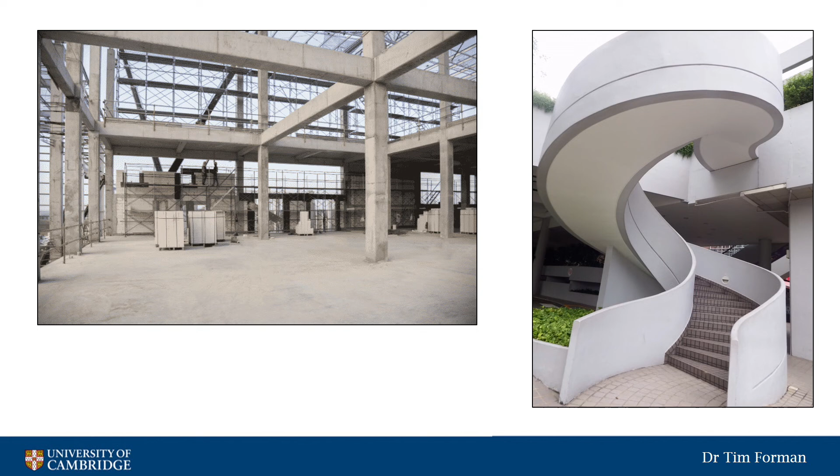So we all know that concrete is a wonderful material. We might even call it a wonder material. It's used really everywhere around us. We have come to take it for granted as part and parcel of how we build and construct our built environments. And in fact, when we look around the UK, the vast majority of cement is being used in buildings, not in roads or in infrastructure, but in buildings. And we know that across the UK, the primary use of concrete across all sectors is in fact in concrete frames for buildings, which we might argue is perhaps not an absolute necessity to be using concrete in that sort of application, but nevertheless a highly useful and affordable material it is.

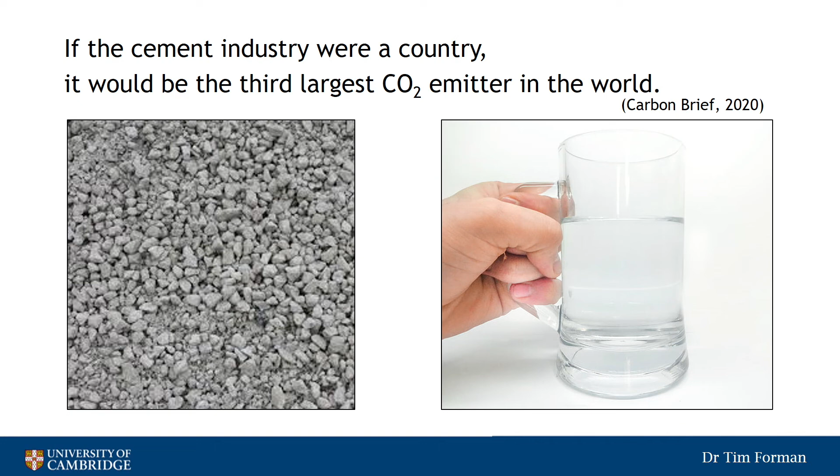In fact, cement is such a wonderful material that it is, next to water, our most consumed resource globally. And when we think about the carbon intensity of cement, we use so much of it that if it were a country, it would be our 3rd largest emitter. That's the 3rd largest emitter globally, strictly from the production of cement itself.

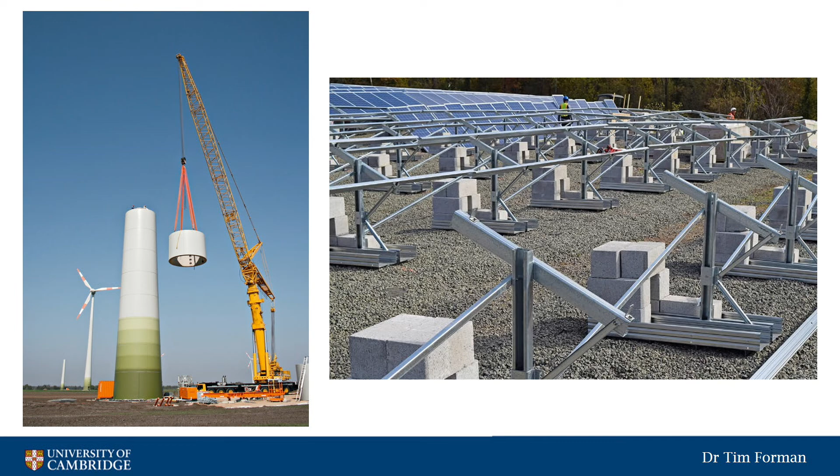How do we build our built environments without cement? I think arguably we know that we cannot, so we need to find new ways of adapting. In fact, it's so ubiquitous that we even need it to construct our renewable generation technologies, such as windmills or photovoltaics. So what's the problem with cement?

Well, I might boil it down to 4 principal categories: energy or carbon, water, sand, and the waste that it typically engenders when we build with it. So in terms of energy and carbon, we know that roughly 7 to 8% of global carbon emissions are coming from the production of cement.

In terms of concrete, of which cement is of course a part, globally about 9% of industrial water usage, or almost 2% of all global water usage, is being tied up in the production of concrete. Using sand as an aggregate is not a necessity, but of course is by far and away the formulation that we look to, and we are using it at such a rapid rate that indications are over the next 30 years or so we will be outstripped of our supply globally. We will have no more available resources of sand that could be economically tapped.

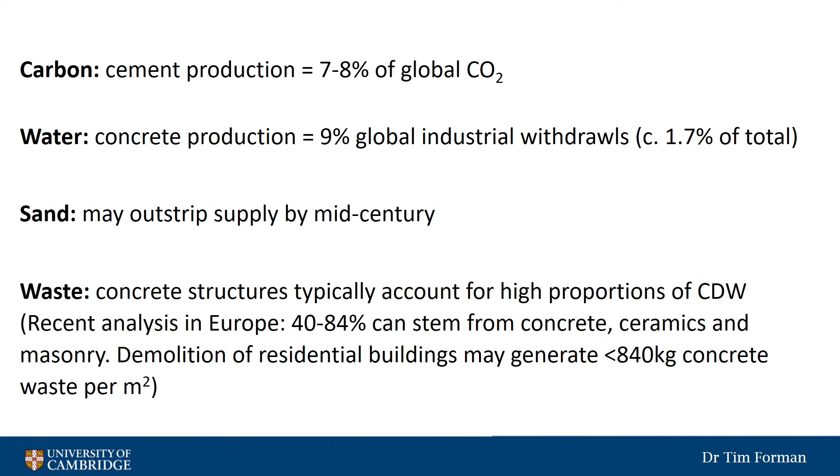And then lastly, thinking about waste, production of concrete or cement is not necessarily creating much waste, but the use of concrete in our built environment is a very large factor of our waste. So much so that when we think about the waste leaving construction sites at the end of their lives, somewhere between about 40 and 85% of all that waste tends to be concrete in Europe. And when we think about residential buildings built of concrete in the UK, some studies have found as much as 840 kilograms per square meter of living space is being produced just as concrete waste at the end of an asset's lifetime.

I'll run very quickly, as I've been tasked with giving you a bit of an overview and introduction to the issue, through some of the inherent problems that cement manufacture carries with it.

In essence, much of it boils down to this. Our current way of producing cement, which accounts for about 98% of the cement we're producing globally, is Portland cement. Portland cement, by its very definition, creates CO2. You don't need to remember your chemistry class too much, but it helps to recognize that this is intrinsic, this is a problem. Strictly, the conversion of limestone and clay through the application of heat to produce clinker, the core component of cement, is itself responsible for about 50 or 60% of the CO2 emissions of concrete itself. So that is a chemical reaction.

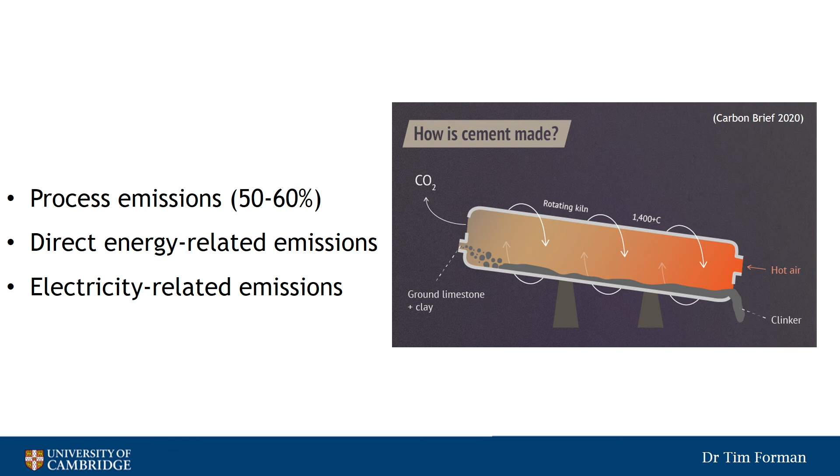We, as it stands, using the raw ingredients that we are using, we cannot get away from that. And the balance of those emissions, which aren't what we'd call process emissions, are coming from the heat required in this process and the energy being brought into the production facilities.

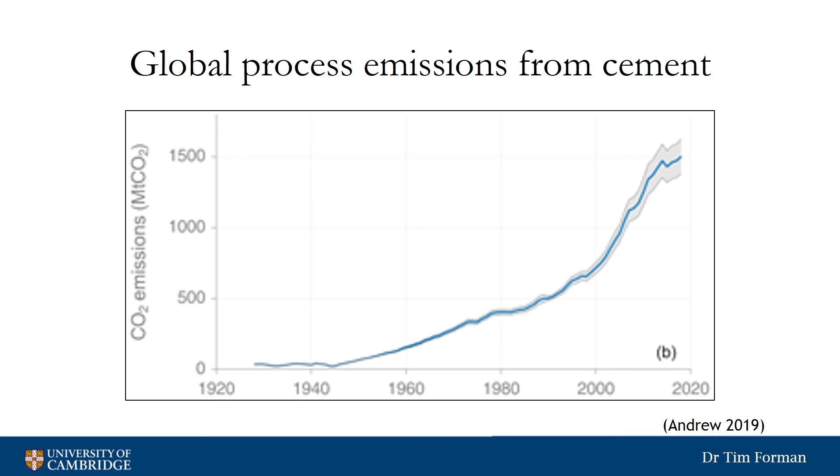So we know that this is in fact creating a growing problem in the UK, and in the world, this is not a problem which is going away. This is a graph showing you from about 1930 to present the process emissions. That's the chemical reaction that occurs when we produce cement. It's not accounting for direct heating or indirect electricity supply, but strictly the process emissions are growing and growing. When we look at cement production globally, it's a similar story.

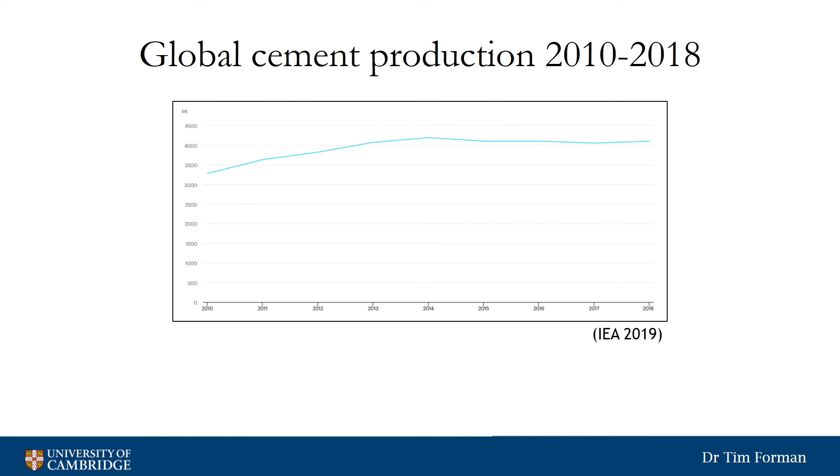Much of this, the vast majority, is actually happening in China, but countries like the UK, across Europe, we are all continuing to produce cement at considerable quantities. We know that currently we're producing globally something in the region of 4 billion metric tons of cement, and under a business as usual trajectory, that is predicted to increase to 5 billion by 2050. So when we talk about having a zero carbon future, zero carbon by 2050, this is inherently a conflict.

I'll run very quickly through the carbon challenge. I think we're all aware that this has become a defining issue of our times. The Intergovernmental Panel on Climate Change, a union of scientists around the world, have produced in the last year and a half a projection of where we need to be, what we need to achieve to reach zero carbon by 2050.

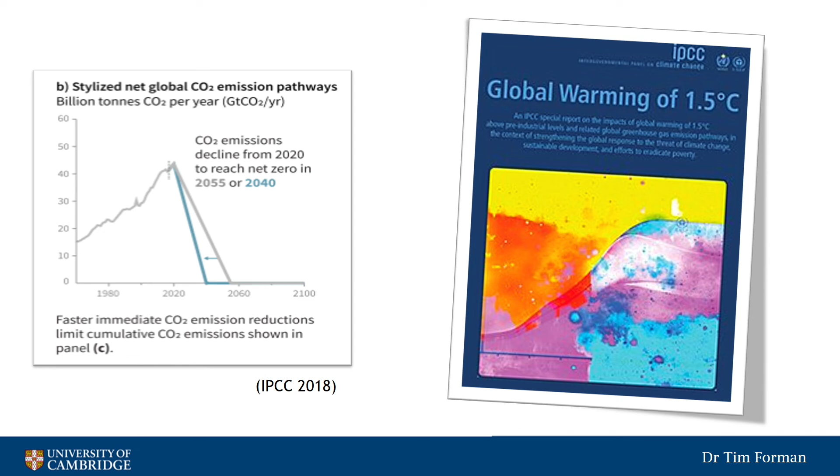We know that's what's required to keep our chances of exceeding 1.5 degrees Celsius to 50%. So if we want a 50% chance of limiting global temperature increase to 1.5 degrees C, we need to achieve what's shown there on the graph: zero carbon by sometime between 2040 and 2055 globally. That's a stark challenge. I like to show my students this.

I think this helps to demonstrate it, helps to get your mind around what that feels like. As built environment professionals, what do we need to be doing? It's rapid decarbonization. So to do that globally, we need to be reducing our emissions by about 7.6% each year over the next decade, and to keep in line with the Paris Agreement, which is not 1.5 degrees but 2, or some estimates say 3.1 degrees C.

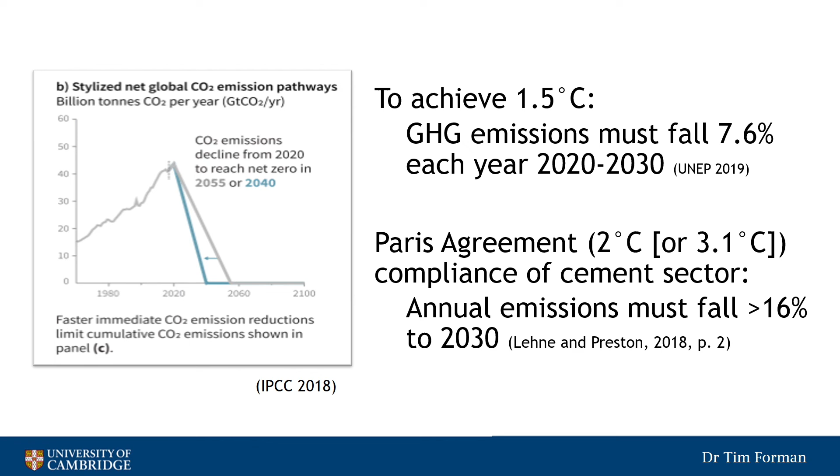Just to meet that objective alone, the cement sector needs to be reducing its emissions by approximately 16% year on year over the next decade. So that's a very stark challenge.

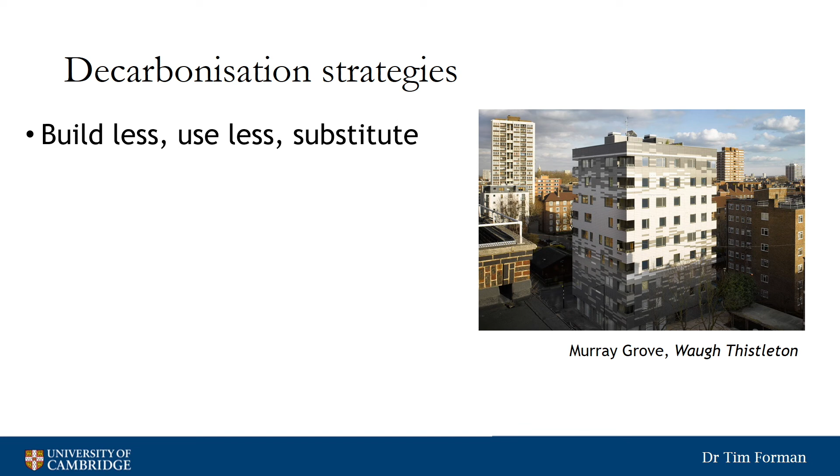I'd like to run through quickly some of the strategies of how we might get there. I would say, first of all, let's not build. I think that's perhaps a controversial statement here at Future Build, but that is the obvious truth. If we want to decarbonize rapidly, we need to simply not build as much, or build with less, or build with lower carbon materials. So as a hierarchy: build less, use less materials to do that, or build differently.

We need to be thinking about embodied carbon. That's a term we should all be very familiar with by now. We need to understand that it's not just the operational energy, not just the energy it takes to build or operate a building that matters. It's all of the carbon from the point of origin through to the end of the asset's life that counts. When we think about design or construction, we need to be thinking in terms of embodied carbon.

Is cement the right material to use, or is concrete the right material to use? Sometimes it is. It has many great advantages, but often it's alternatives that make more sense, alternatives such as timber or steel.

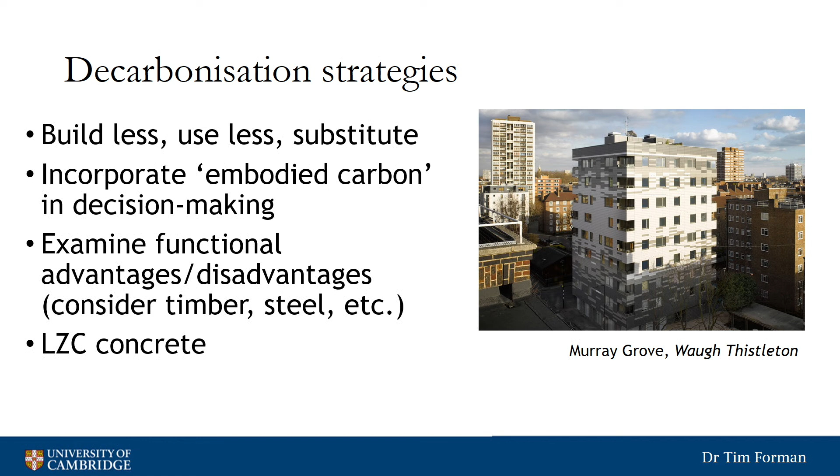So within the supply chain, there are opportunities. We are seeing the introduction of more and more supplementary cementitious materials. Things like GGBS or fly ash are becoming more and more common. In fact, in the UK, they're accounting for about 20% of our carbon reductions that we are achieving.

Fuel switching, the fuel that's used to heat that clinker, and then finally carbon capture and storage, though notably we don't yet have proof that those technologies are working.

We need to be doing more with less. We need to be optimizing our structures. We need to be creating lightweight structures. We need to be looking to technologies with which we can achieve the same structural properties without as much material.

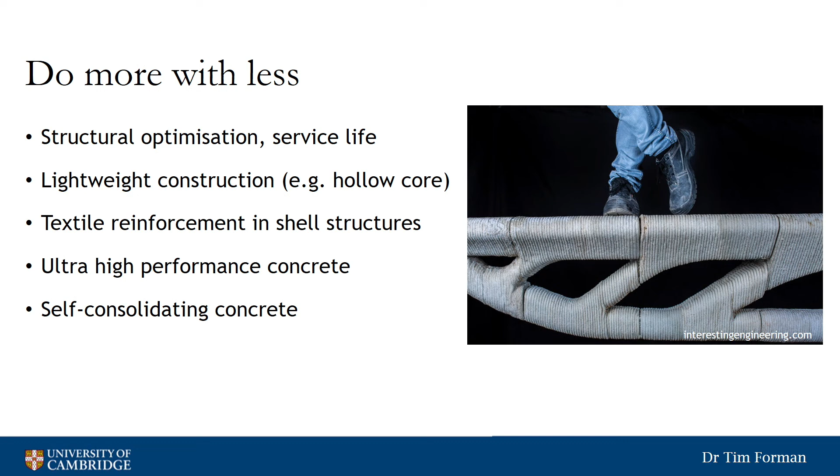We need to be constructing differently, I would say. Can we use precast concrete to our advantage? Sometimes we can, sometimes we can't. It may cost more, but typically it gives us lower carbon.

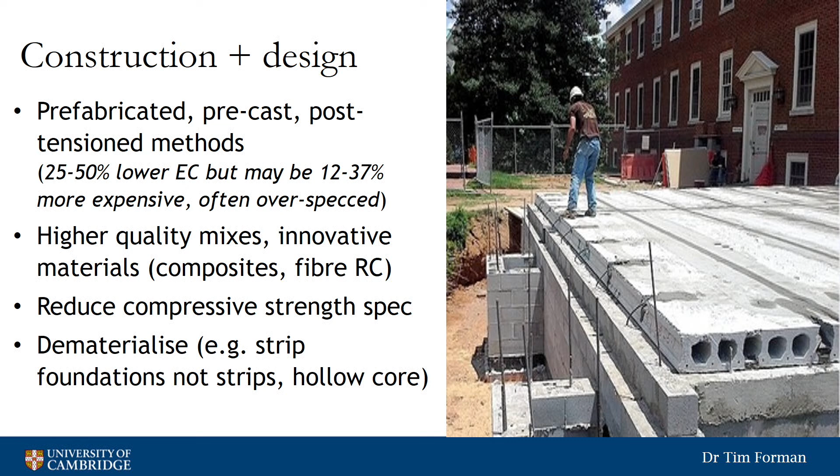It's important to specify only what we need and not over-specify. I think we are all familiar in the industry of how easy a habit that is to slip into.

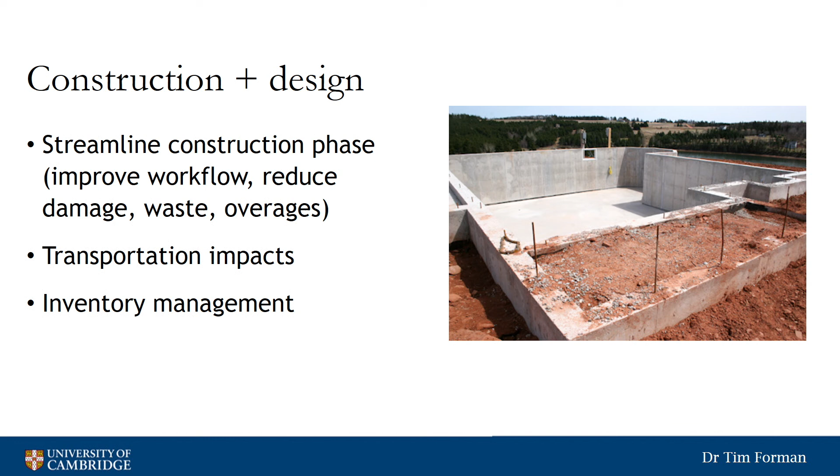In thinking about how we use cement in the actual process of construction, I think we can become leaner, we can become more efficient, and that's very important to do. We need to be reducing the impacts that are required to transport materials to sites and then from sites at the end of their lives.

And finally, closing the loop. We are all hearing more and more about the circular economy. How can we use cement as part of that? I would argue that designing for deconstruction, creating buildings that can be disassembled, having a national database for these waste materials, or materials at the end of their lifetime, is critically important.

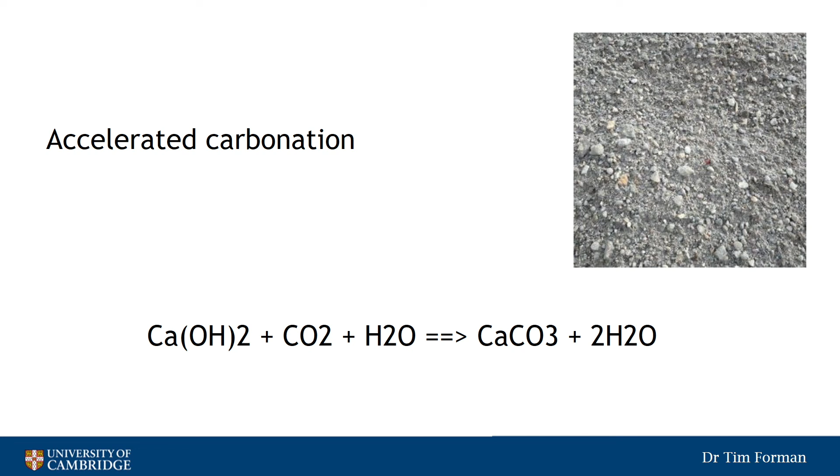And finally, there is a lot of talk about the potential for accelerated carbonation, so that is the absorption of CO2 from exposed concrete, or more promisingly from exposed concretes like magnesium concrete. That is a real opportunity, but I think we are probably making too much of that opportunity than is actually a reality. There are lots of issues with why that's not actually as achievable as we might like to think.

Skipping quickly along, there are emerging trends, I would say, that are very promising. Our ability to use computational power to predict, to structurally optimize our designs is growing year on year. It's important that we harness that.

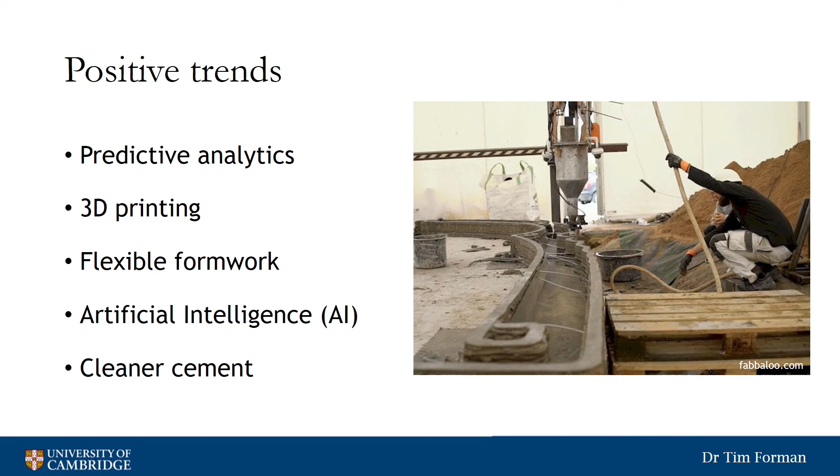Can we harness the opportunities that additive manufacturing, 3D printing offer us to dematerialize, to use less, to apply cement, or to supply concrete only where we need it? I would argue we can. And further opportunities such as AI all should be driving forward these capabilities.

So very quickly, I'll run through just a couple of the barriers and let you read the rest. We talk a lot about the use of GGBS, which is a byproduct of steel manufacture, and of fly ash, of coal power. Those are very good resources. However, we have finite stocks of them, and in a zero carbon future, certainly in the UK and in Europe, we really do not have the stocks that we need to decarbonize cement manufacture.

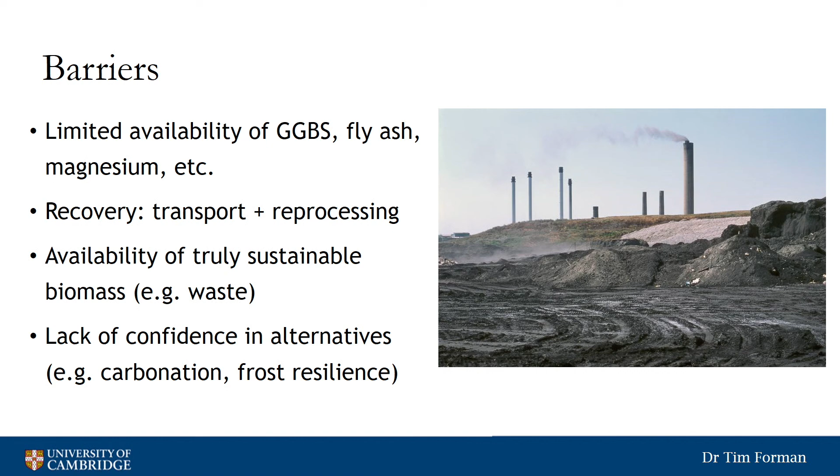Other places may have a different story, such as China or India. I think part of the problem really is that the global cement manufacturing industry is a very concentrated, consolidated industry. There are a small number of major producers. Those producers hold the vast majority of intellectual property that we need for decarbonization.

They have been slow to bring new products to market. They've been slow to decarbonize their own industry. So we're reliant in part on them and on SMEs who are holding some of the other innovation patents to drive this change forward. So we need to be moving past this reticence to change our business models. We need to be introducing the real cost of carbon in our decision making.

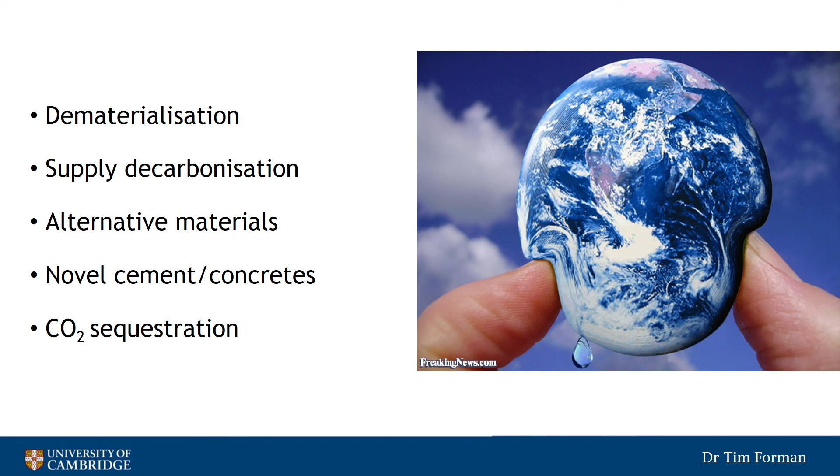We are, unfortunately, I think we are still reliant on the R&D from SMEs and from major producers to do this. So in summary, how do we achieve this dematerialization? How do we achieve the decarbonization of our cement supply? How do we transition to using alternative materials, novel cements, new cement mixtures, and how do we ramp up the sequestration potential of concrete? I would argue that it's really down to 4 simple but yet very challenging directions.

The first is we need to continue the drive toward more innovation. We need to fund more innovation. We need, of course, more research. I would say that as I'm a researcher. We need to demonstrate these products and their ability in the market. And lastly, we really need to drive the market through all of our practices. We need to be driving the market for cleaner and lower carbon cement and concrete.

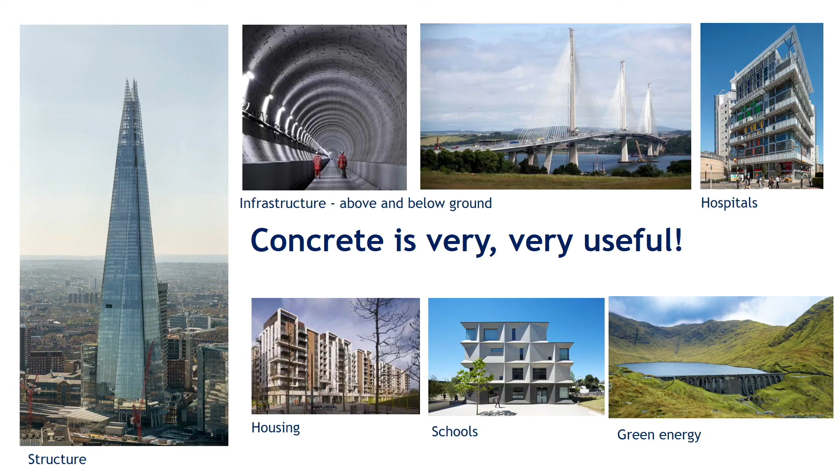So what's going to change about the way that we live today that's going to mean that we don't need its performance? That's a really important question we've got to ask ourselves, and it's a critical time, everything is under scrutiny. It's the performance of concrete, not just the fact that it's really good at fire and it's everywhere and cost effective, but it provides us with really good key benefits that support the way we live today. If we're going to change the way that we do things, maybe we can do it with other materials. What's going to give?

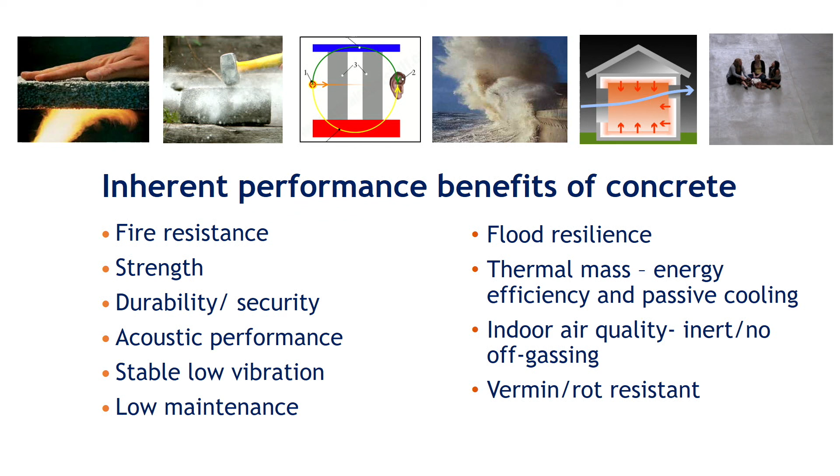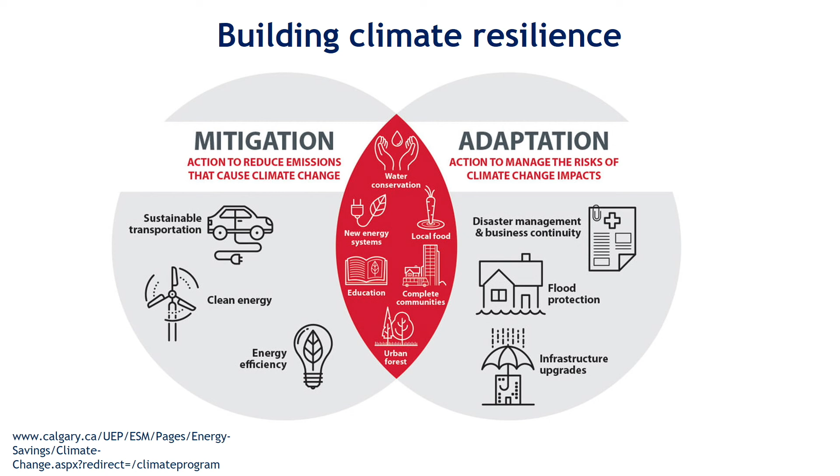I would argue actually a lot of these are all sustainability benefits. I'd argue in the future, in a climate change emergency, concrete might even be more needed. It provides passive cooling, that risk of overheating, a really fundamental risk we know affects our health within the UK. And floods, we know we've been suffering from all of those things today. It's really, really important - if we're talking about climate change adaptation, climate change mitigation, we have to look at both sides of the coin. You cannot talk about one without the other. It's now embedded in the way we're looking at these things. We've got to think about mitigation and adaptation - there's no point in doing one and not the other, you'll just be undoing all that good work you're thinking about doing in the first place.

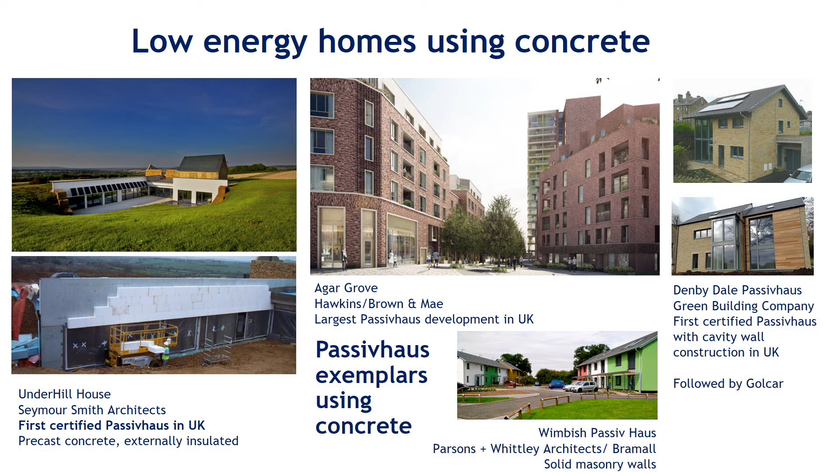So what does construction in a low-carbon future need to do? It needs to be energy efficient. Concrete, like every material, can do it - there are more Passivhaus examples using concrete than any other type of material globally, believe it or not. It can get there, and that's all about our detailing as architects, isn't it? It's about energy efficiency, fabric performance, attention to detail. We just have to do that better than we've been doing, maybe.

The thing that concrete brings to the table is added value. It's got thermal mass, so it means your structure can also passively cool, which means reducing energy use throughout our building.

The definitions for net zero at the moment are all about operational energy. They're not yet about embodied. I'm going to get onto that in a minute. But it's a really important factor, we must not forget that.

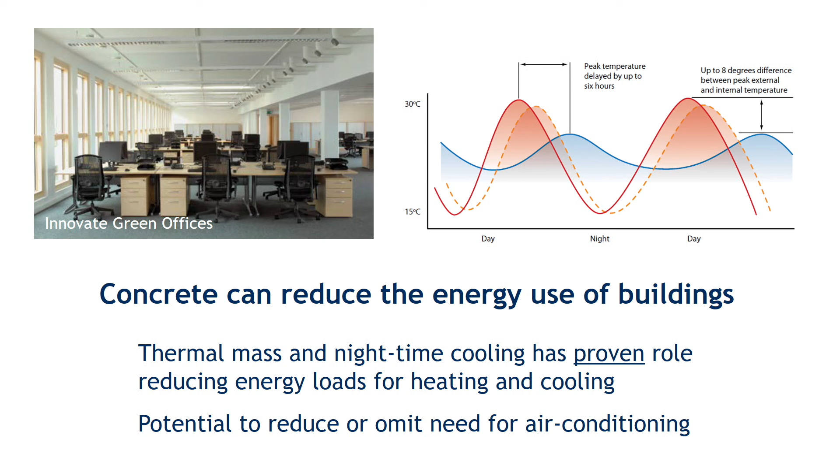So what are the credentials of concrete? We've talked about it before. I would suggest that probably UK concrete is much better than you'll think it is already. This is an industry that has been decarbonising for decades. This isn't new, okay? It's 30% lower than it was in 1990.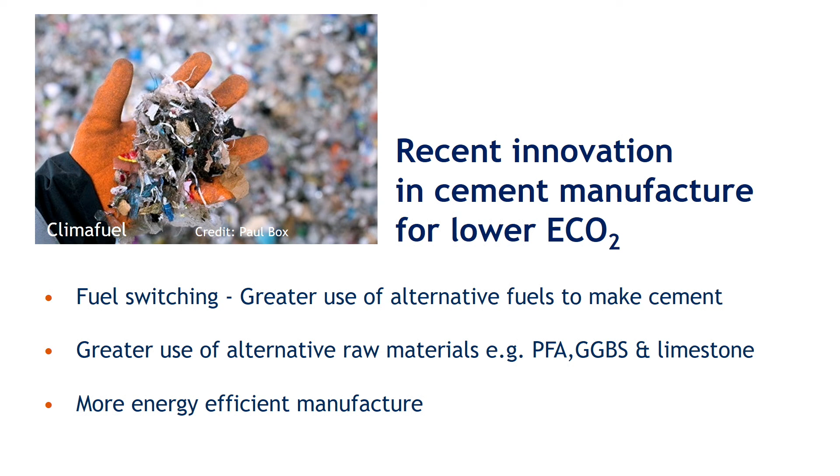But how has the industry been doing it? They've been decarbonising, fuel switching, all of the things that Tim talked about. It's not the end of the road, there's still an enormous amount that could be done, but they've been doing it. There's been a commitment to do this: greater use of other alternative raw materials, and more efficient manufacture.

So is it enough? It's a good question. A lot of people will say it's not fast enough, and there's a point to be made there. But a zero carbon future - people will say to me, is there such a thing as a zero carbon concrete?

Will there be a zero carbon concrete? Will there be a zero carbon cement? Well, I believe there will be. If you ask me, with all the different things that are there, I absolutely think so.

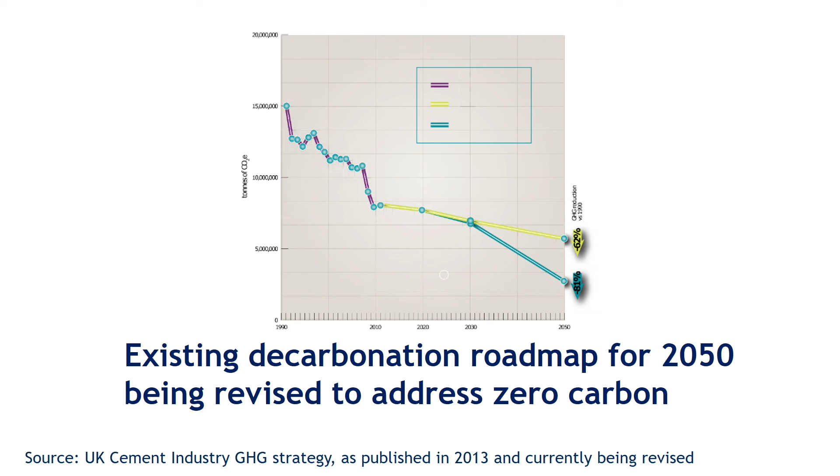In 2013, why do I think that? Because in 2013, there was already a commitment to an 80% reduction. That was committed to meet the Paris Agreement. So it's going to take something to get that extra 20%, but they're working on it.

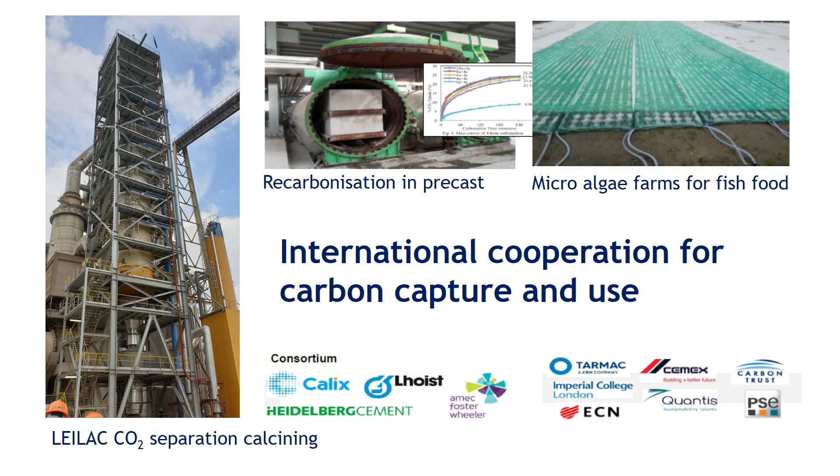I've got a lot of colleagues working really hard on that, looking at it. It's going to take some transformative industry change to do that - carbon capture and use, these are some of the things that are already going on. Alternative cements, new cements, use of different types of binders that don't rely on Portland cement. Those are all coming through.

But the point is, we don't have to wait until that's going to happen. If we don't believe it's going to happen, it doesn't matter, we don't have to wait. We can do huge amounts now. And as architects and engineers, we should all be doing those things now.

And that's what we do at the Concrete Centre - provide lots of guidance about how to do it. You can make significant changes to the carbon footprint of concrete now if you specify it right, if you design it right, more efficiently, all those things.

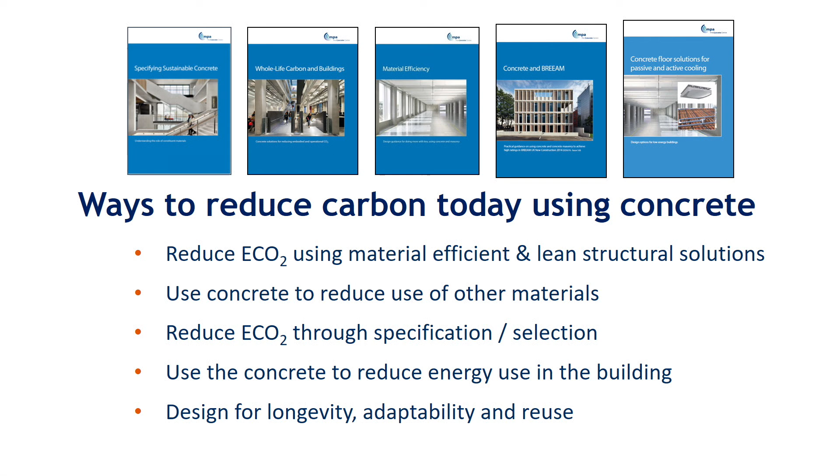Use different types of cementitious materials, ternary cements, as the new standards are going to change. Current standards are going to evolve in the next year or two to offer more opportunities for lower carbon concrete. Today, without needing a new standard or waiting for one, you can use a concrete with 80% cementitious materials, so only 20% ordinary Portland cement in it. That's today, that's not waiting for anybody.

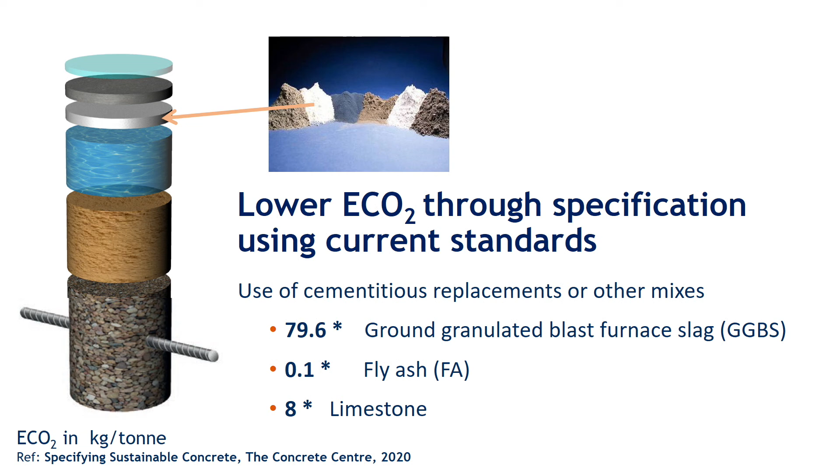So why aren't we, you, doing it? Don't wait around, ask the questions. Now, of course, there are some barriers and some things to think about, but concrete isn't always as high carbon.

The LETI report, I hope you've all seen it, brilliant document that's come out. Actually, I was quite surprised to read this, but there was an example that came from Hawkins Brown with their brilliant life cycle analysis assessment tool. Look, concrete was one of the lowest, a low carbon solution for cladding. Why? Because it's simpler, there's far less other stuff that's got to go in there.

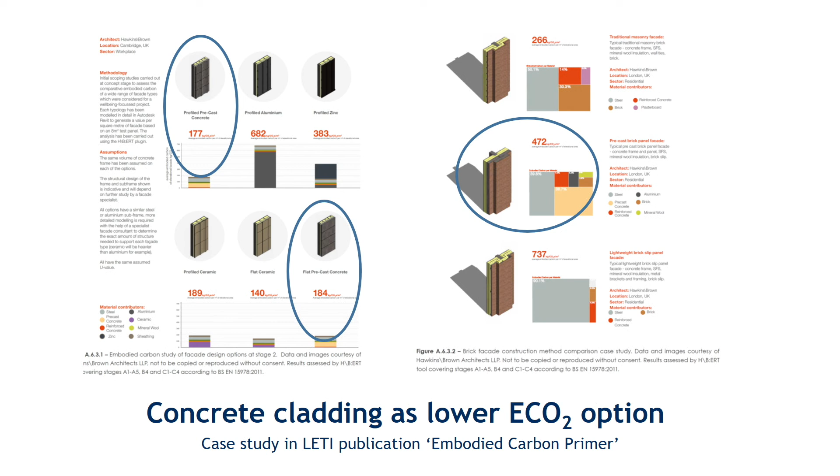What's clear is that we've all got to understand embodied CO2 much more than we do. And the thing about concrete is it does lots of jobs. Lots of other materials need lots of other things to help you do the job, and maybe that doesn't all get counted at the same time.

So what's clear? Absolutely, we've got to use less stuff, we've got to use less of everything, haven't we? So use concrete, but use it in an efficient way. Structural design - maybe we've got to go back to rib slabs and look at thin shell technology.

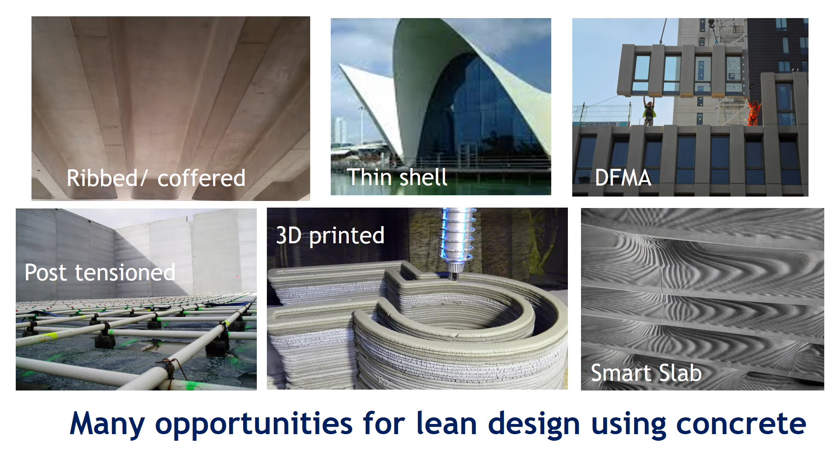Is this a future of what it is? 3D printing and looking at different ways of getting all those benefits with concrete, but far less of it. Using concrete to use less other stuff. We don't need to line it, it does the fire performance without it, acoustics as well, so less other materials. Use less stuff.

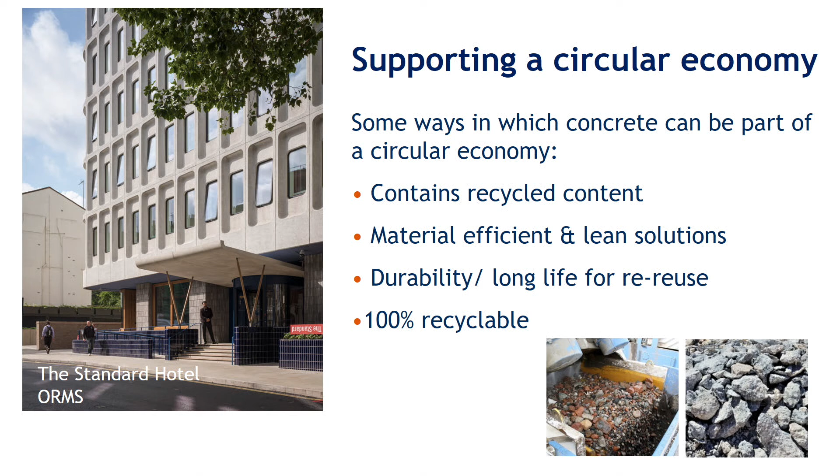We're already doing this, you talk about recycling and the circular economy. A future environment that is zero carbon will be a circular economy, so buildings and structures designed to last for a long time, reuse them. Not only recycled aggregates, but actually one of the benefits about recycled aggregate in the UK is we're already absolutely at the max. All that stuff produced from site, 92% in the UK is being used as recycled aggregate. There's nothing going into landfill. We're already using that stuff, and it's carbonating, it's sequestering carbon.

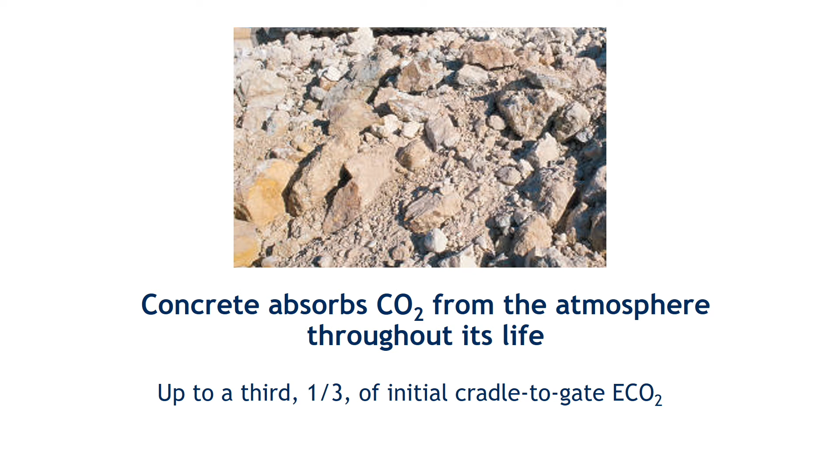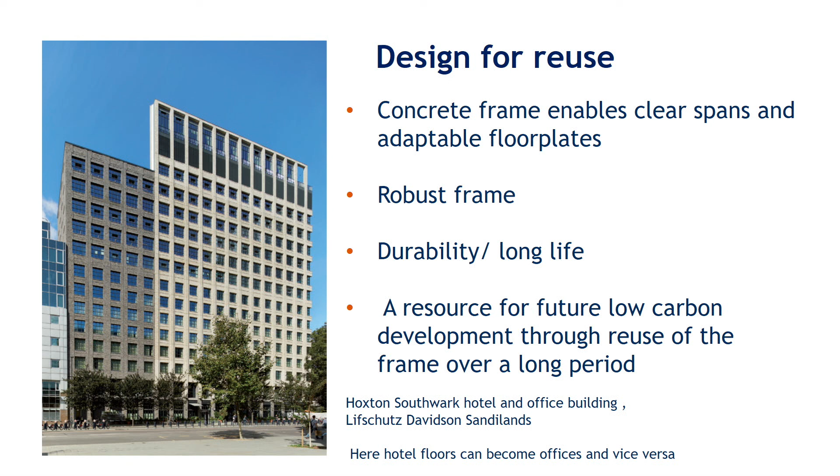So that's the summary really. We can use concrete, recognise that we can do it better, design for it to last for a really long time, use it where it's appropriate, design for reuse, design for it to be reused, demounted. It's got a long life, it's got a lot of benefits. And I think it really does have a role to play within a zero carbon future, so long as we just focus a little bit more.

Thank you, Elaine. Brilliant. Good points at the end.

Okay, we've now got Dr. Joe Guy from the Environment Agency. He's Environment Manager at Team 2100, the Environment Agency's 10-year asset management program delivered by an integrated delivery team of client, consultant, and contractor. Within this framework of Team 2100, we'll refurbish and replace tidal flood risk management assets in London and the Thames Estuary, and that's going to use a lot of concrete. Over to you, Joe.

So the question is, why do it? Well, we spend most of our time - if I read the FT too much, it's my fault, but the FT is all over this. All of this comes from the front page of the FT over the past 6 months. Business is getting this as an issue, and it's quite clear that we need to step up to the sustainability agenda as a whole.

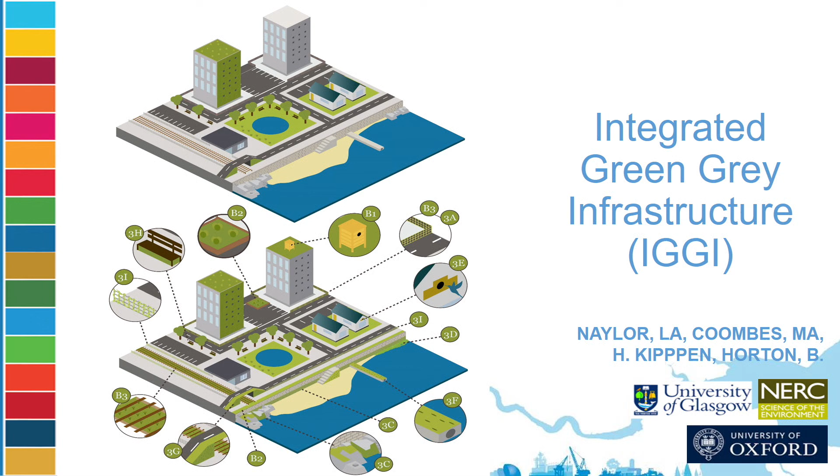Now, in simple terms, that means we have a continuum from kind of grey infrastructure over on the left-hand side, the typical stuff we might be talking about, a flood wall that might be the height of this wall behind me here, right the way through to green and blue-green solutions. So that's natural flood management, and you'll have heard much about that in the press over the past few days. And there on the right is an example of natural flood management, where we're trying to use different ways to hold water up in the upper catchments.

But in the middle, there's a whole opportunity for us to think about how we do more. So there we can see on the far left, we can kind of retrofit things onto concrete walls to add a level of biodiversity that wasn't previously there. We can attempt to build things differently so they actually retain water and provide some benefit, or we can move through the middle, put some sort of texturing on, and then we kind of move into greener and greener solutions.

So what we're interested in is where we're working in central London. Ideally, I'd love to have a piece of green infrastructure, a bit of natural flood management, but nobody's going to give me a lot of money to buy a large amount of real estate in London so I can set back the flood defence. There'd be a lot of annoyed people, understandably. So we've got to find ways of dealing with the grey infrastructure and how we improve that.

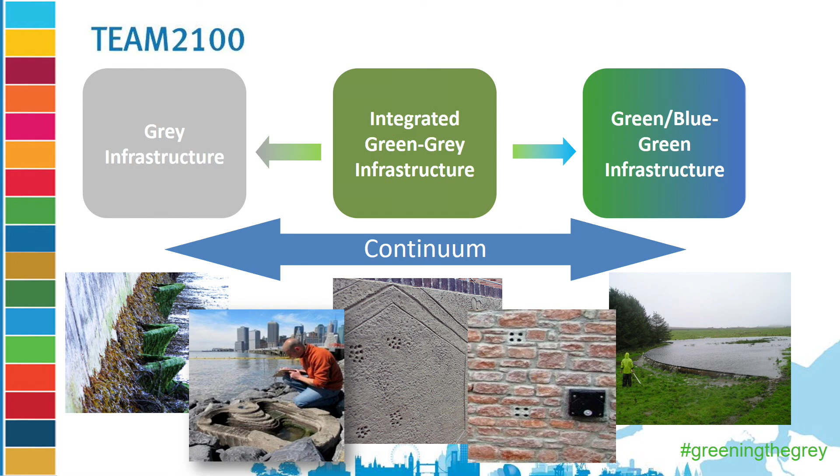So then let's talk about some options for low carbon and cement-free concrete. Here we've got an example of a solution in East Anglia where we had a traditional wall, which was on the far left-hand picture there, but we knew that we had to increase its resilience in order to deal with the likely pressures that were going to be put on it by tidal surges in flood events.

So we had to think, what can we do to reduce that carbon load on that asset? So what we managed to do was use a cement-free concrete in order to deliver a reduction in CO2. That was, if you like, a 67% reduction, even above what we would get by using a 50% GGBS concrete. So there's quite a significant benefit there for us to think about, and how we attempt to use those and move those onto more of our works.

Part of the reason for me standing here is to say to the industry, to all of you here, we are looking for these kinds of solutions to come from our supply chain so that we can help deliver a more resilient future.

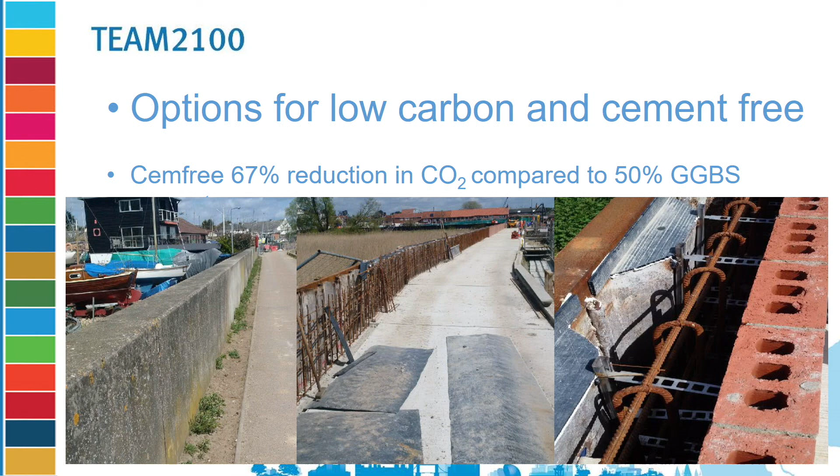So we talked about civils redesign, where we're trying to do something a little different. Traditionally we build big structures for wave walls and large flood defence assets. This is an example on the south coast of Britain, a structure about 5.5 metres tall. Normally it would be a big flat concrete face - we can't really do much with that. It looks like a big concrete face, doesn't it? It's devoid of any form of biological life.

So we're looking at different techniques to add additional texture to that concrete, at quite a depth, probably around 60 to 80 millimetres, in order to give that concrete an ability to trap and hold some form of biotic activity, so we generate niches. Interestingly, not only does this generate that biological outcome, but it also makes the concrete more resilient to the drying and wetting process and the thermal characteristics, meaning a longer asset life for that same asset. So we're winning in two ways.

So that was the final thing, and then finally I wanted to talk about sustainable materials. Now it's all okay for us to say we want to do something with concrete, but you all quite correctly say to me, 'but Joe, you build other stuff.' So whilst we can try to change the admixtures we use with concrete, or different types of concrete, we also need to think about the other assets that we own and operate.

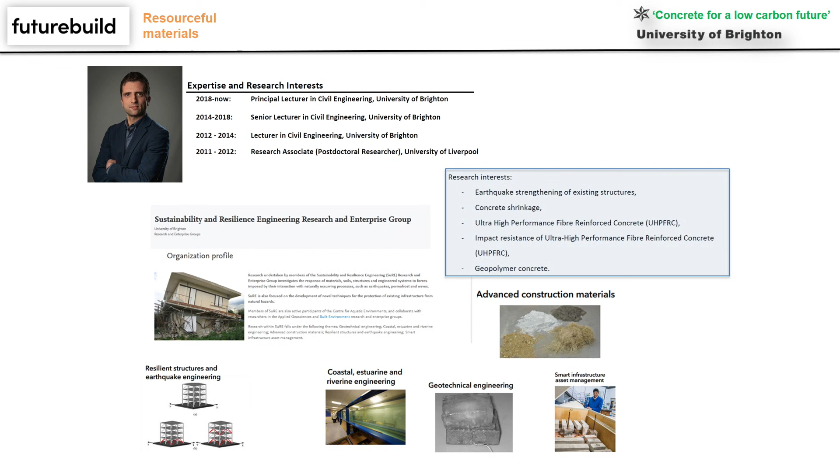Regarding the global issues, I'm sure you know most of these things, as previous speakers told about this. We have the energy and climate change. At the same time, the population is continuously increasing, and clearly we have the need for sustainable development.

This is a very nice definition given by Brundtland in 1987. According to this definition, sustainable development is the development that meets the needs of the present without compromising the ability of future generations to meet their own needs.

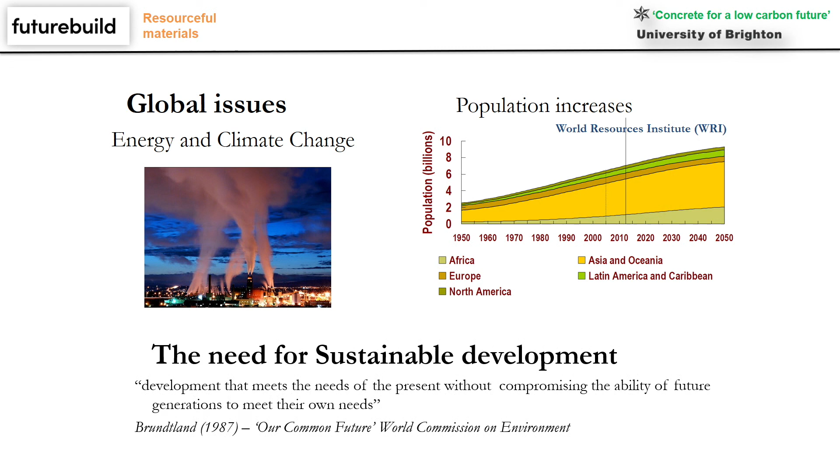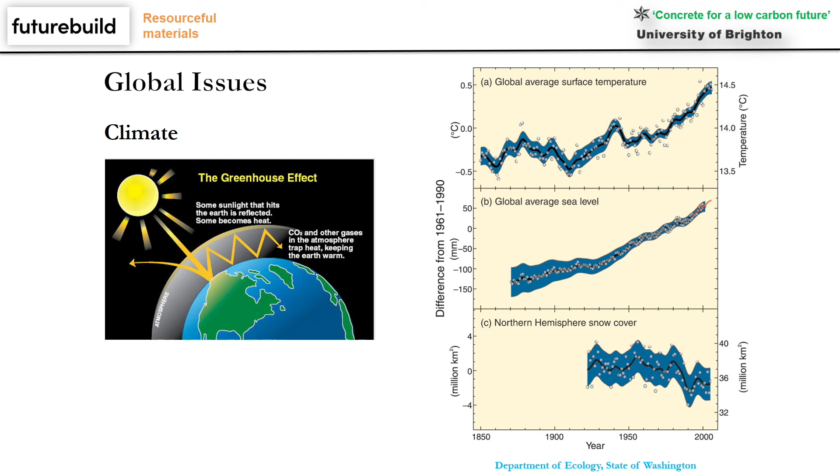So we know we have CO2 emissions. We have quite a big jump ever recorded worldwide, and clearly this is linked to global issues. We have the increment of the average surface temperature, and this leads to the average sea level increment and reduction of snow cover. Therefore, there is an urgent need at the moment to work towards sustainable development.

How can we do that? Clearly, we need to minimize consumption of non-renewable energy, minimizing negative environmental impacts, but at the same time we need to maintain human satisfaction. We can't just stop building, because we need to keep our structures and continue building, so we need to invest in new materials, but also keep working on how to reuse our existing structures. So the 3 R's: reuse, reduce, and recycle.

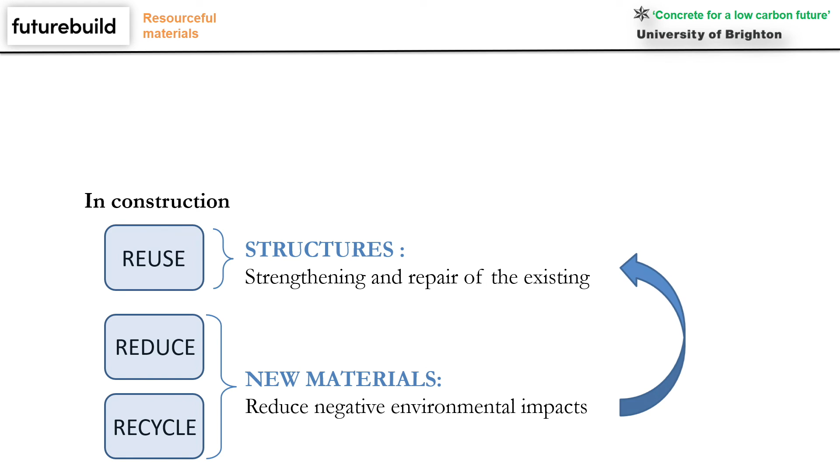What I'm actually working on is using waste and recycled materials to make concrete, and also using this type of concrete to repair and strengthen existing damaged structures, so as to reuse our existing structures rather than demolishing and building new ones. I'm trying to invest in new, cement-free materials which give good properties and can be used for the strengthening of existing structures.

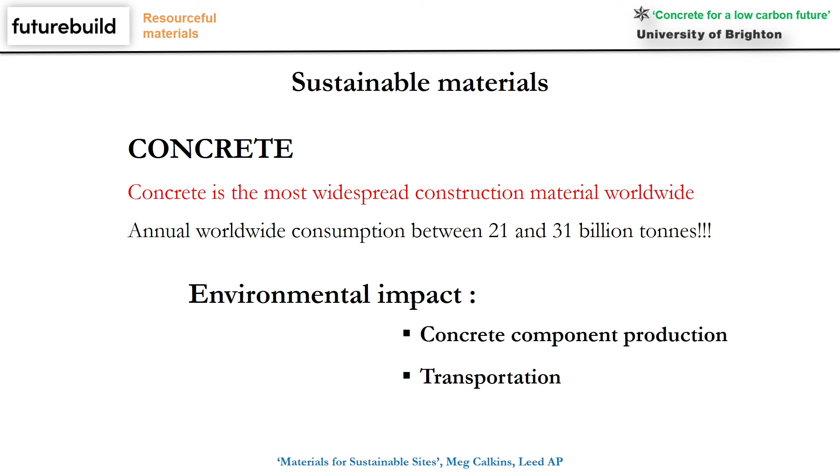We know that concrete is the most widespread construction material worldwide. The numbers I have show annual worldwide consumption between 21 and 31 billion tons. And we are aware that the main environmental impacts are due to concrete production and also due to transportation.

We know that cement, which is the main part of concrete, is responsible for at least 5% - probably the numbers are slightly higher, like 7 or 8%, of world CO2 emissions.

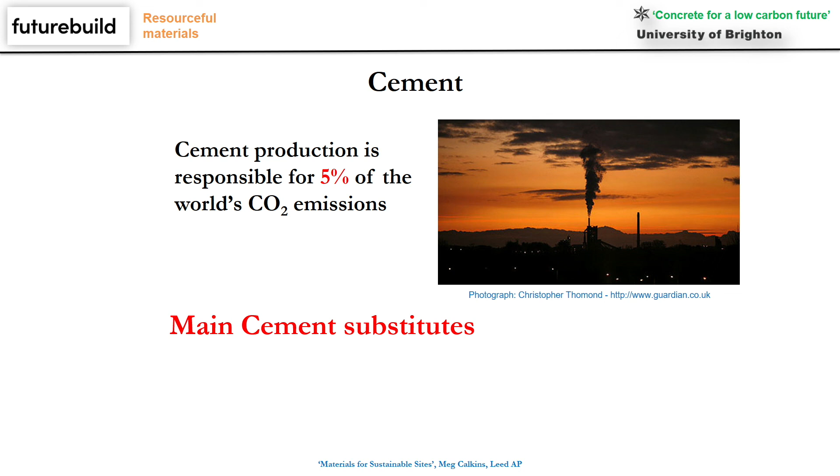At the moment, we are using as cement substitutes fly ash, GGBS - some of the previous speakers talked about this - and we also use other materials such as limestone, metakaolin, silica fume, and so on.

So fly ash, probably you know what it is - it's a byproduct from the combustion of coal, collected from the chimneys of coal-fired power plants. It's a waste product, and current practice is something like 15-20% replacement of cement, or up to 40% in very high fly ash concretes. We have some benefits such as increased workability, higher strength, less shrinkage, and some drawbacks too, such as longer setting times which can be detrimental for the early age strength of concrete. So we need to be careful when using these materials and at which percentage.

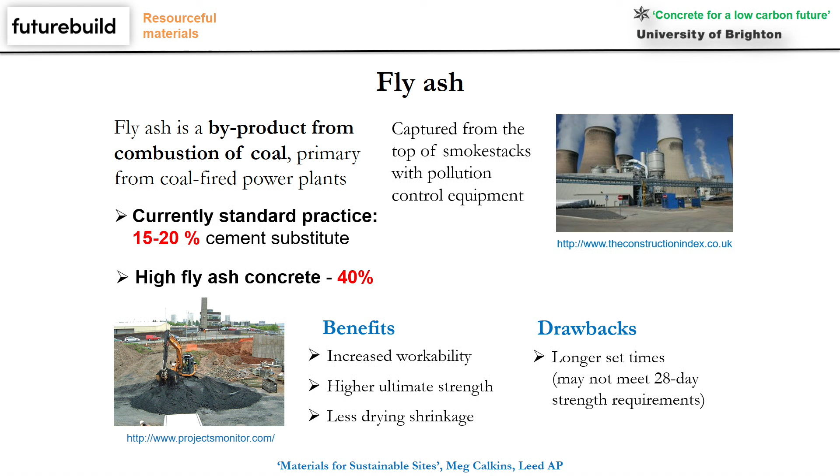Another material we're using quite a lot, which previous speakers talked about, is GGBS - ground granulated blast furnace slag. It's a byproduct of iron production, and it can replace quite a high percentage, 70-80%. We can have good benefits in terms of strength and workability, but again we need to know how to use these materials.

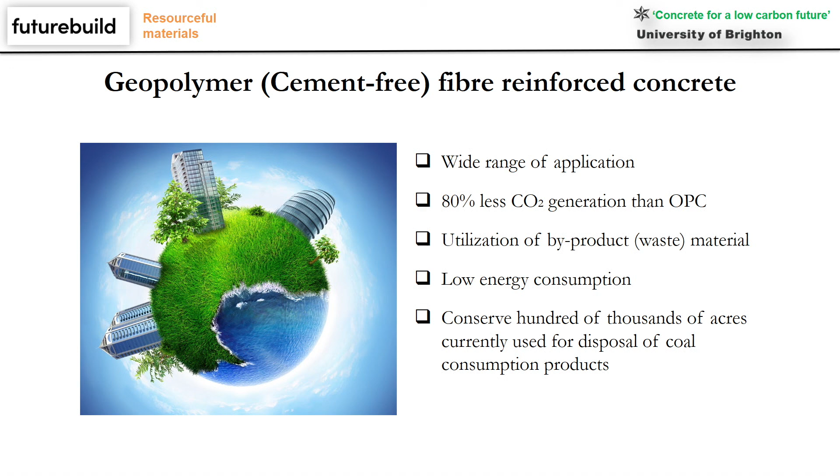What I will present today in the next few slides is what we are doing on the development of cement-free concrete materials. We are replacing - it's a total replacement of cement - using only waste products, only fly ash and GGBS. Our task is not only to use waste products, but also to achieve high strength and good properties so that these materials can be used for structural applications and also for the repair and strengthening of existing structures.

This is an application which can have a quite important environmental impact, because the UK cement production is something like 10 million tons annually, and we know that 1 ton of cement leads to something like 0.8 tons of CO2 emissions, so we can save something like 8 million tons of CO2 emissions annually.

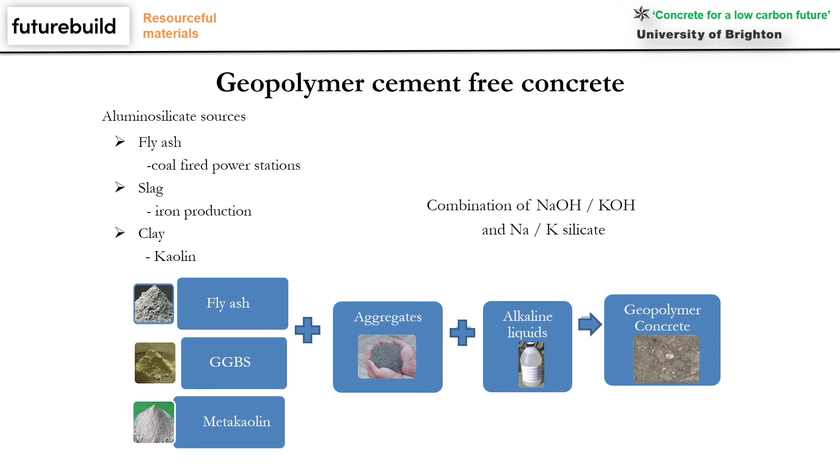How do we make geopolymer concrete? We use waste materials, normally fly ash, GGBS, kaolin as well. We can use aggregates, but we also need to do the activation, so we need to add some chemicals - normally sodium hydroxide and sodium silicate, or potassium - to provide the strength. So we have the waste materials, aggregates, the activators, and we can make the geopolymer concrete.

I will present 2 or 3 papers of our recent findings on geopolymer concrete and on the use of this material for structural applications. This one is focused on how to use concrete for in situ applications.

Most of the materials we are using so far use quite a lot of fly ash, and actually we need to have heat curing, and we can get a very good strength in one day. This is fantastic for precast applications. What we're focusing on now is material which gives quite good characteristics for in situ casting as well.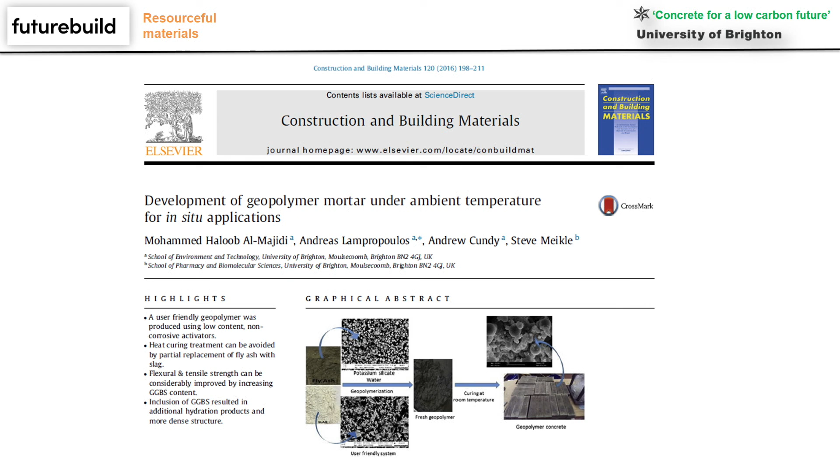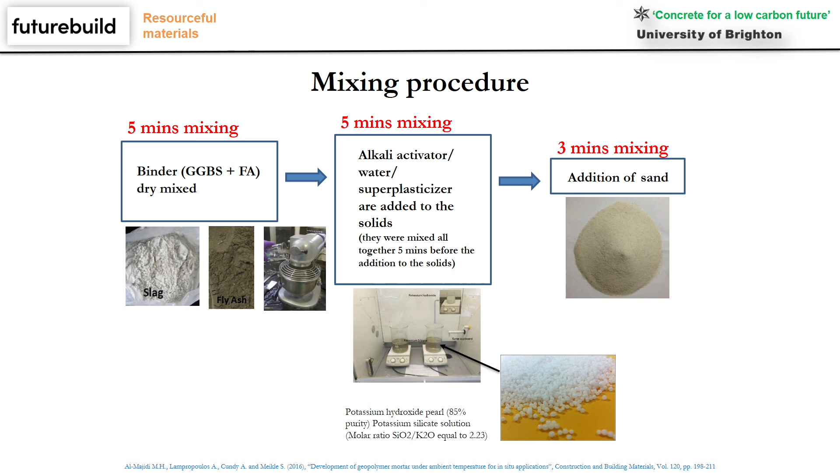It's a user-friendly, non-corrosive material, so we used a combination of GGBS and fly ash. The chemicals, potassium mostly, was used here, some super plasticizer and sand. The concept was to optimize the process, to find what is the optimum mix design in order to have good early strength and also good ultimate strength without any heat curing.

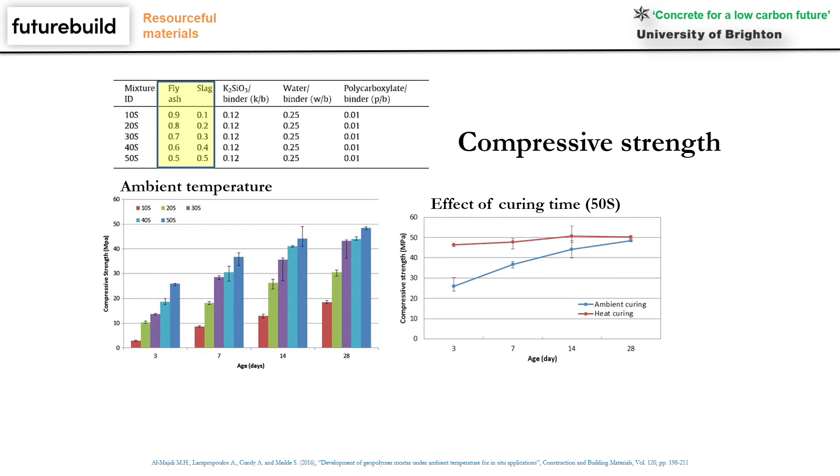We had different percentages of fly ash to slag ratio, and we checked how this affects the strength, but also how this affects the workability. The workability is a quite crucial point when you work with these materials. Practically, the more you increase the GGBS, the less the workability, but the higher the strength. So we ended up with our mix composition, which is good for in situ applications but also has good workability.

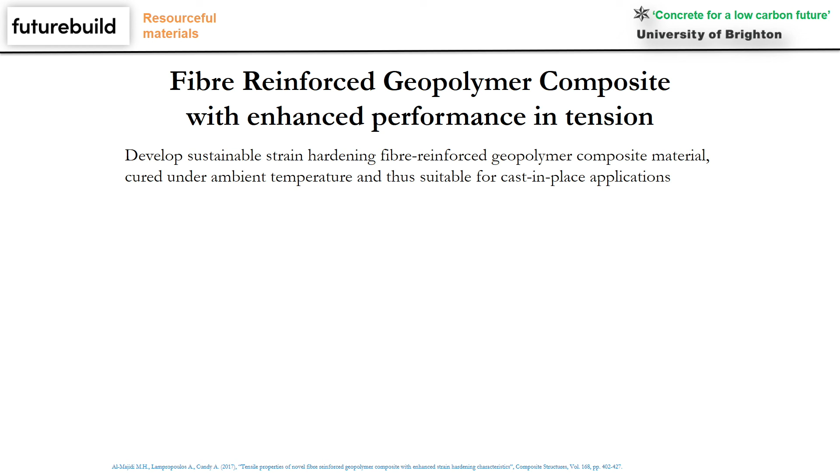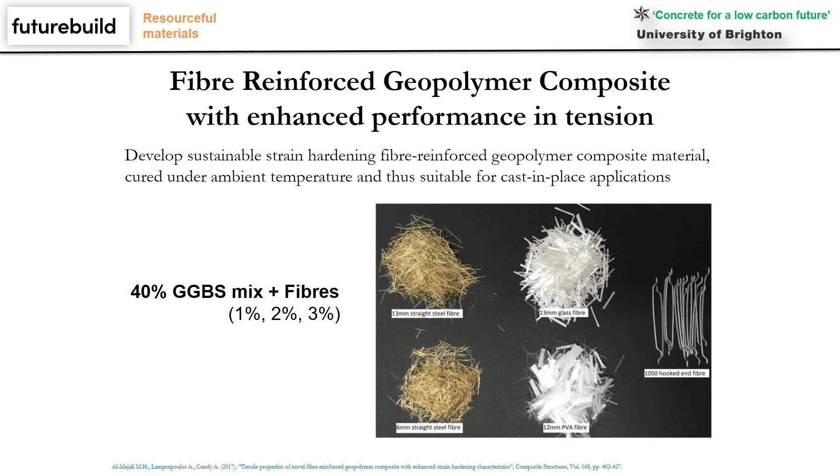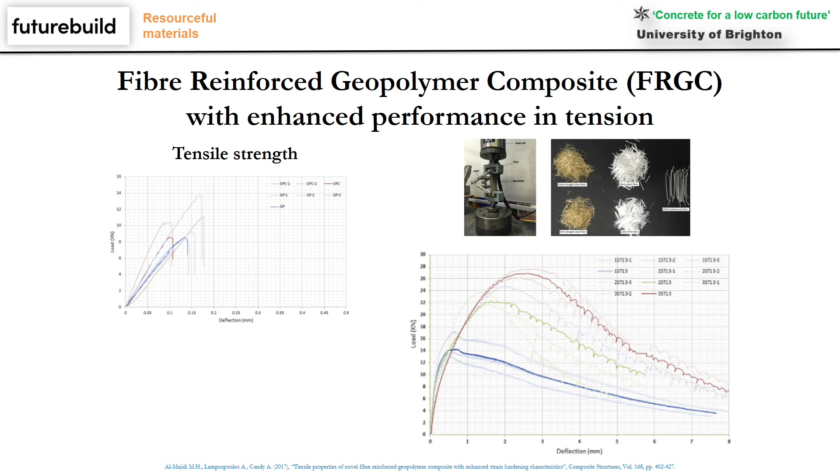Then we moved on to the actual application of this material for the strengthening and repair of existing structures. We used the mix design that we developed in the previous study, and added appropriate types of fibers, steel fibers, PVA fibers. We used these materials, which now have very high performance, good energy absorption, and good tensile characteristics for the strengthening of existing elements.

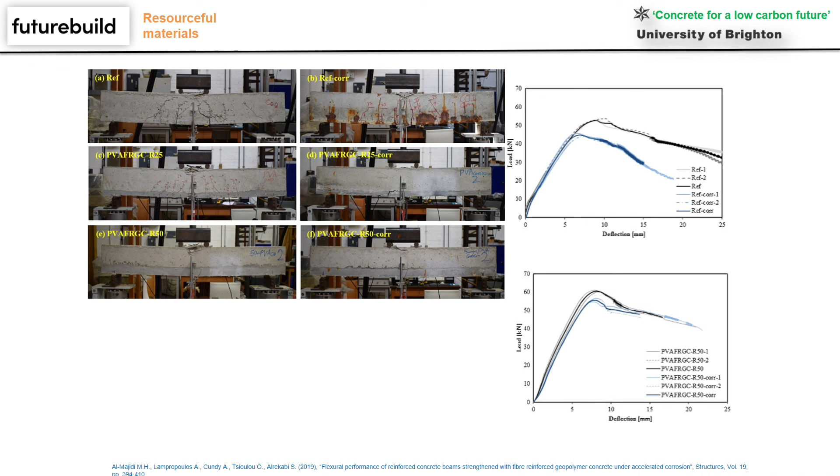We had our reinforced concrete beams, and cast additional layers using this geopolymer high-performance concrete. The findings were very good, it was quite promising that the structural performance was significantly improved. At the same time we did some accelerated corrosion tests, and found that the geopolymer can also protect the steel bars from corrosion. This can lead to increased durability, which is very important for structural applications.

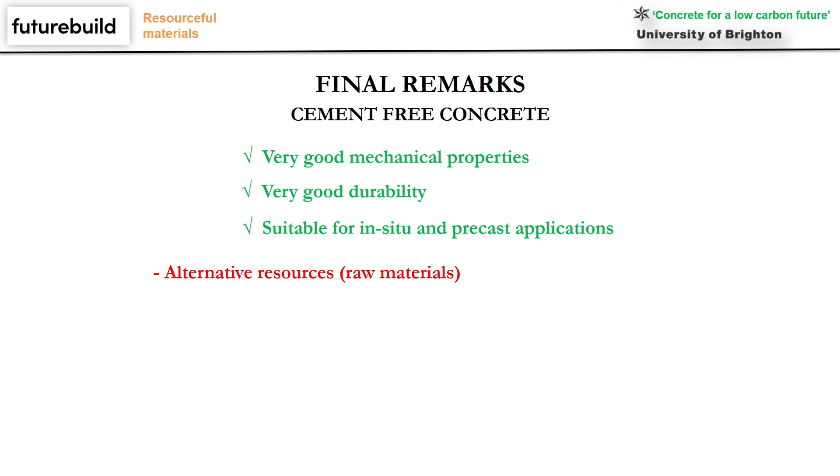Coming to my final slide, some general remarks regarding geopolymer concrete: we can have very good mechanical properties, very good durability, and this can be good for in situ and clearly quite good for precast applications. We need to work a little bit more on the use of alternative resources, since the PFA and GGBS have quite limited availability and will become even worse in the next 10 years. We need a better understanding of the characteristics to allow extensive use of this material in industry, and clearly we need codes and standards to allow the use of cement-free concrete in construction. Thank you very much for your attention.

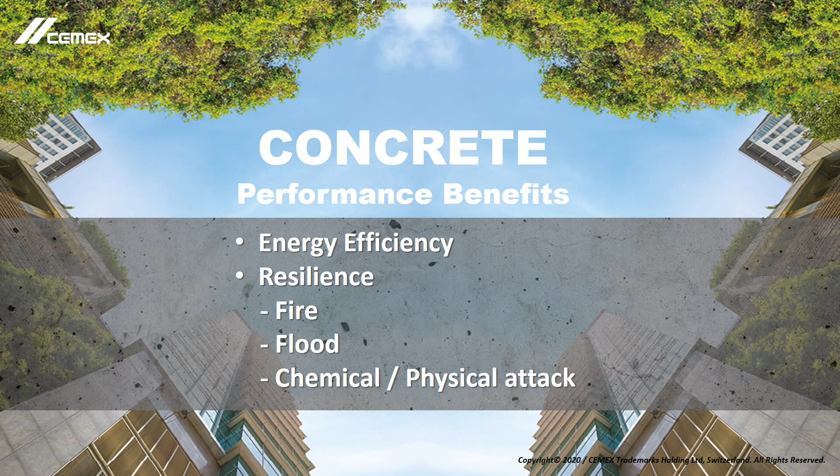So low carbon concretes—how do we define a low carbon concrete? There is no value for the embodied carbon per cubic meter that would qualify concrete as being classified as low carbon. So should we be using the term lower carbon instead? I think often when we think about a low carbon concrete, the automatic association is with clinker-free, cement-free, geopolymer, alkali-activated materials. These are really, really important as we move forward to a more sustainable construction, and certainly as an industry, both in terms of the concrete production industry, cement production industry, and designers and specifiers.

We all need to work together to ensure that these products have their place in future construction. But it's really, really important that we remember that low carbon concretes exist today that meet current building and supply standards, using cementitious products that exist today and utilizing better admixture technology. So we can produce low carbon concretes that meet today's design and supply standards.

What else do we need to do? I can supply and produce a low carbon concrete, but is it important that we have a step change in how we design and specify concretes? Tim talked about reducing over-specification. How many people in the supply chain add on their design margin? I know that I do, and I'm pretty sure the engineer does, and perhaps the architect, and perhaps the contractor—all leading to an over-design of specification.

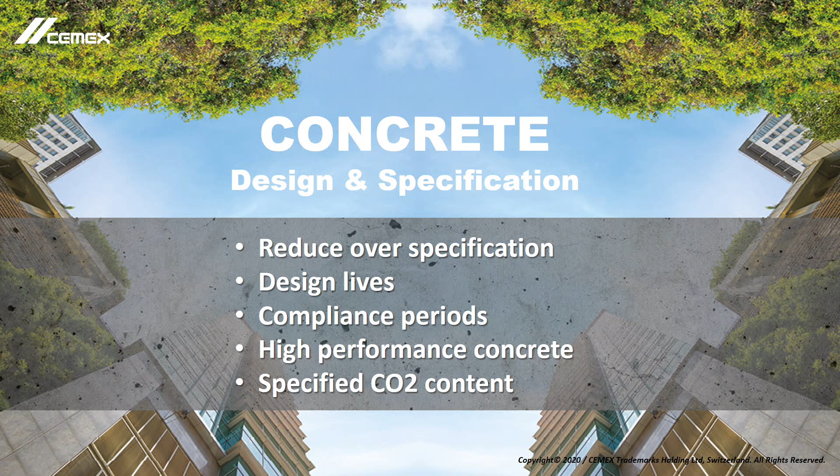Should we be using self-healing concretes? I think Elaine touched on that earlier. There's an excellent project ongoing called RM4L, a collaboration of Cambridge, Bath, Cardiff and Bradford University, which is looking in detail at self-healing concretes. Can these types of concretes lead to a reduced CO2 per build?

So CEMEX's commitment—we have a global commitment that was announced on the 19th of February by Fernando Gonzalez, our CEO. We are committed to a reduction in CO2 emissions of 35% to ensure alignment with the Paris Agreement commitments, and we're committed to that by 2030. We're also committed to deliver net zero concrete globally by 2050.

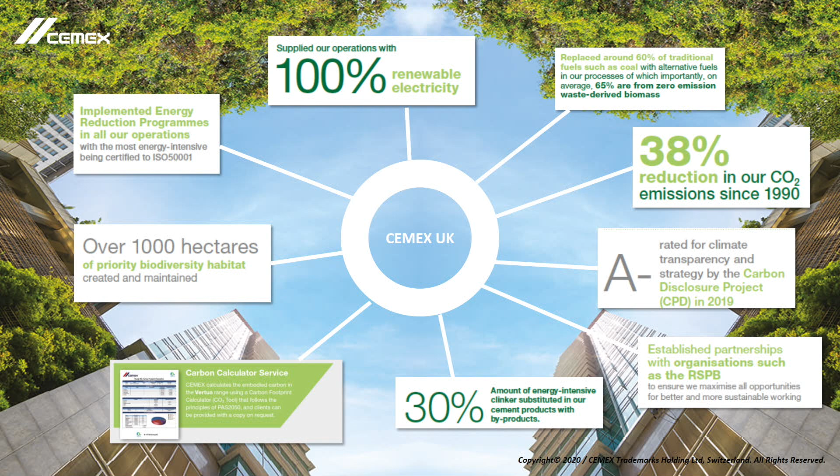We're formally launching a bespoke low carbon concrete which does include a geopolymer cement as well. This is the first scheme in the UK which will offer contractors the opportunity to not only buy low carbon concretes, to specify low carbon concretes, but to also offset the remaining CO2 as well. So for the Vertua Classic and the Vertua Plus, you've got the option of offsetting the remaining CO2, and with the geopolymer cement, you have to offset it because we all have to take our place to do it.

These are genuinely lower carbon concretes with certified offset for the remaining emissions. These, and the initiatives currently in place as I touched on previously, are really only the start. As Elaine touched on earlier, we have to work together to ensure that we have a lower carbon cement, concrete, and perhaps more importantly, a lower carbon construction.

Thanks, Duncan. Thank you, Richard.